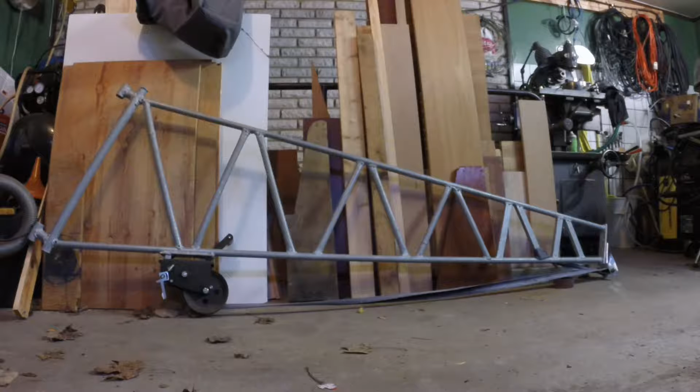This is the old crane. It is made from scrap. It is round tubing, rather thin walled, and you know, my idea was to save weight, but low weight and stability doesn't often go hand in hand. So this crane was not as rigid as I had hoped. Well, not in that way you see it from that angle, but it is bent the other way. I can show you that later. That was the first mistake.

The second mistake was to use a winch with bands instead of wire. The band is totally destroyed, bent, there's a hole in it, and it doesn't stand being outside in the sun and rain all the year round. And then another thing is the pulley here in the end of the crane. It is fixed, so sometimes the load isn't hanging straight down, it comes from the side, and I always get tangled in here.

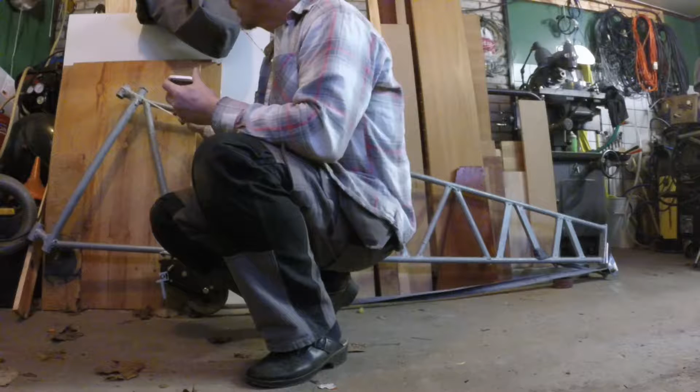The part we are going to make now is this part. We will make a long riser and somehow connect it to these two axles that are on the boat. We'll make the riser here a bit longer, and on the end there will be a pulley that holds the arm. And down here of course there will be a bracket that holds the axle, so the crane arm can pivot. So that's the next part of the project.

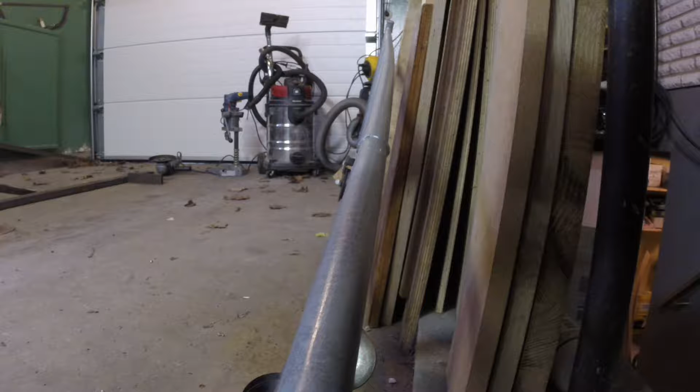I thought I would show you how the crane is bent. I know I'm filming with a GoPro, but this is a real bend, and it is not a critical bend, but as soon as you have high loads on the crane, it will bend more and eventually collapse, of course. So the crane needs to be rigid even in this angle.

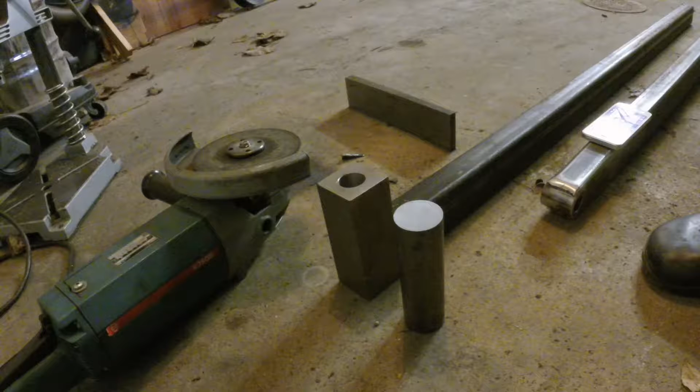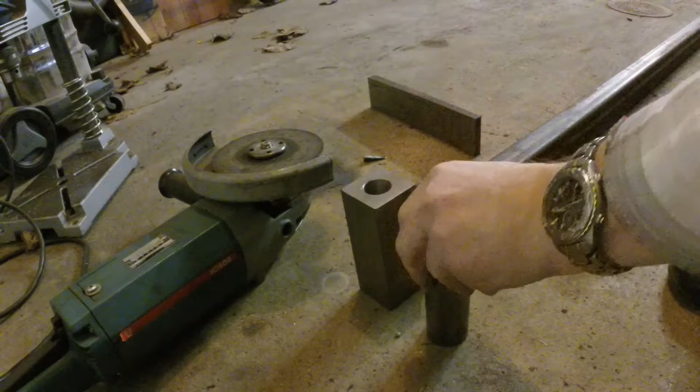I'm having second thoughts. This is going to be on the end of that. Should I use the square or a round? I need to drill a 26mm hole in either one of those. There will be very little material left in this. This is 40mm diameter, and this steel is also 40mm, so it will be nice there. Well, this is the largest piece I have, and it has already got a hole in it. Well, that is too small.

It could of course easily be bored to size in the lathe, and it is 25. Well, it's less than a millimeter that has to go. This, could it look nice? Perhaps I should chamfer the sides here. That might improve the looks. But this piece is the right length, and it looks stable enough. I think I will go with this one.

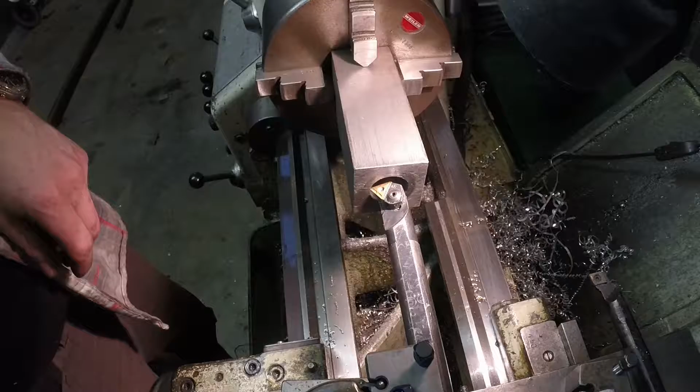And now I will try the more rigid boring bar. Normally I can't use these large tool holders because if they exceed 16mm, normally the cutting edge will be too high. But this is very low, so it might work. Let's give it a try. What can possibly go wrong?

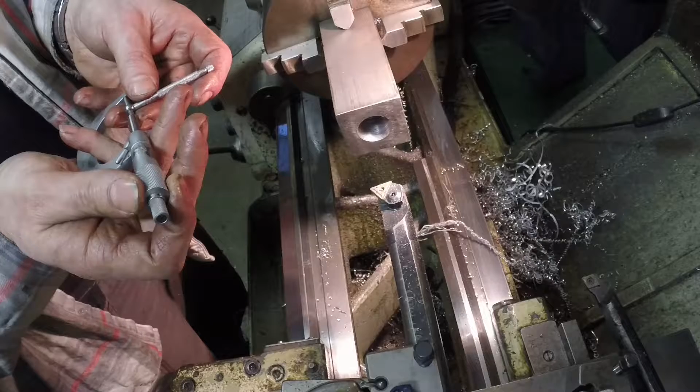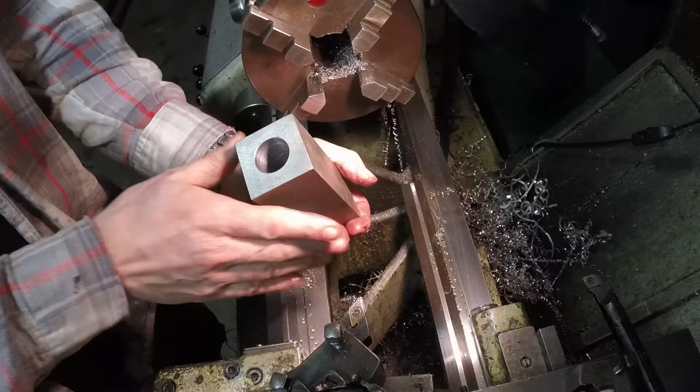I've seen better finishes than that. Will be 26.2 millimeters. Something in those lines. 26.25. Well, the piece is done. Well, that inside is miserable, I know. But it'll have to do. Now I should cut this off in halves.

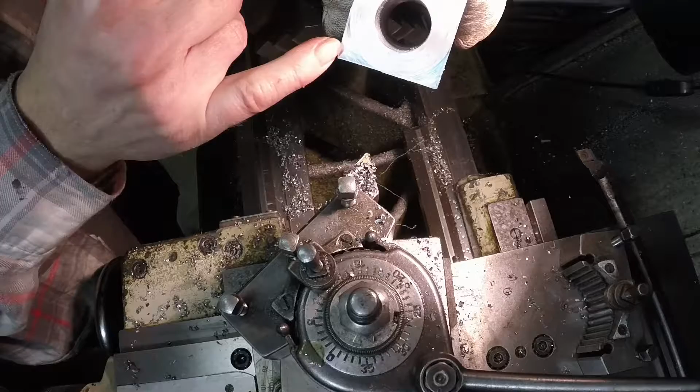Interesting. The finish is perfect when it does the interrupted cut. Well, these are quite sharp edges. Well, a bit of weld prep here, and it's ready to be mounted. But first I will cut the pieces that it should weld to.

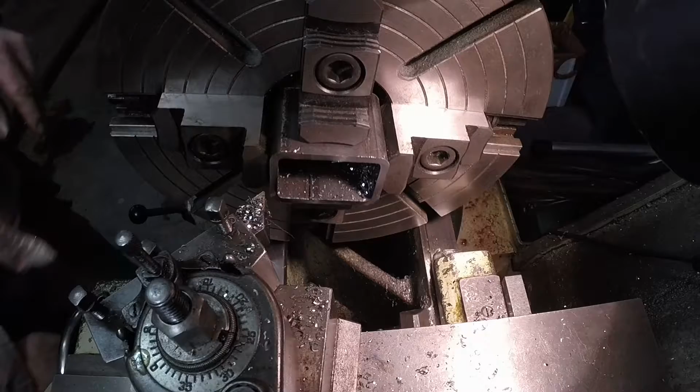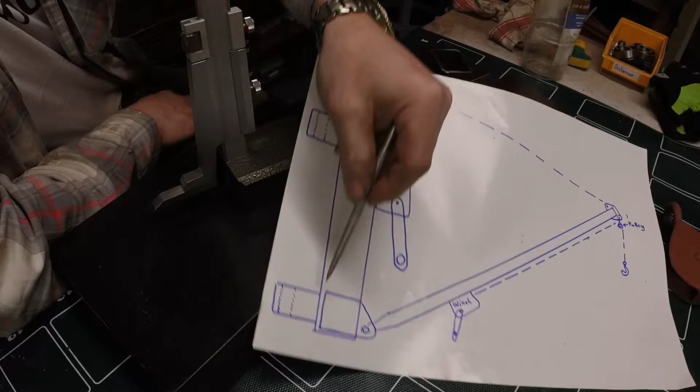Well, the job advances, and presently I've been working with these pieces, and they are now done. Both of them are ready to be welded together, and this piece of tubing is also cut to length and ready to be welded also. And now I'm going to make this bracket down here, and I thought I should show you how I will measure it. Cut these two pieces.

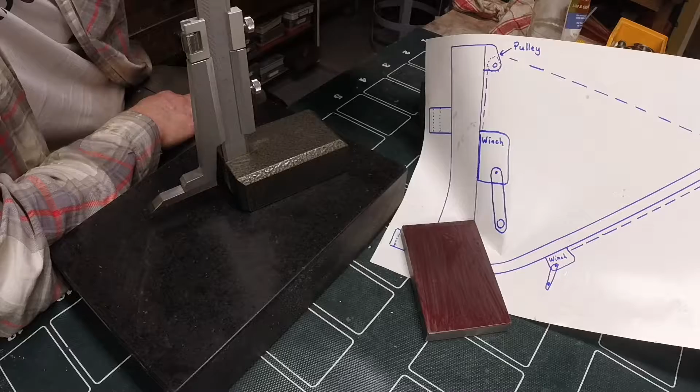I think this hole will be 20 millimeters, and it will look rather nice if it is located 20 or 25 millimeters from the edge. And we will make this slope here straight out, round, and up there.

This piece is 12.5 centimeters long. I think this is 6 centimeters wide here, and I would like this piece not to go all the way, but to give enough room for the weld here. So we'll make this 5.5 centimeters. The rest, 7 centimeters, will stick out. So let's first draw a line at 5.5 centimeters.

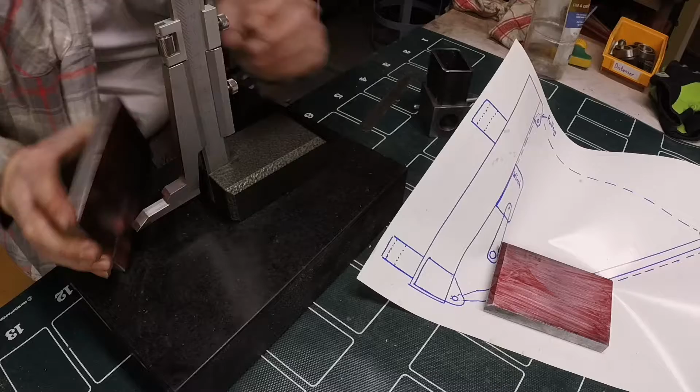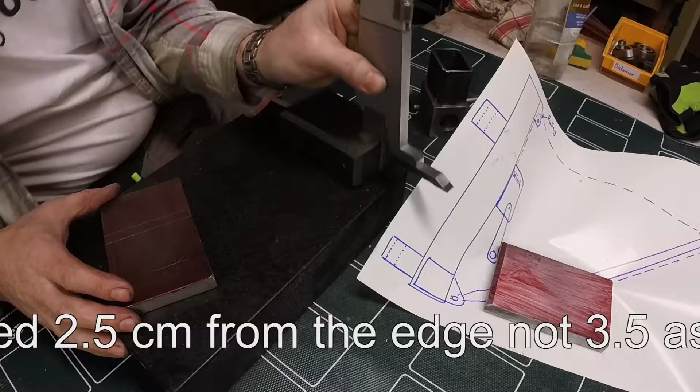So let's make a mark there. Perfect.

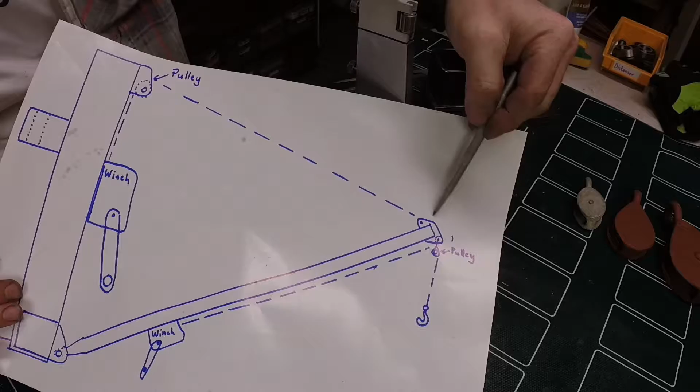So this piece I will mount as I did in the mill with that bracket here. But this time I will not remove as much material, so I can be sure this will be one movement. So I will leave 2 millimeters on the side, and I don't think I will cut this. I think I can mill that out.

However, the hole in the jig, the fixture that I put in the mill, is for a 12 millimeter hole. So we will drill this 12 millimeter first, then mill it, and then drill the rest up to 20 millimeters. So let's do the same on this piece.

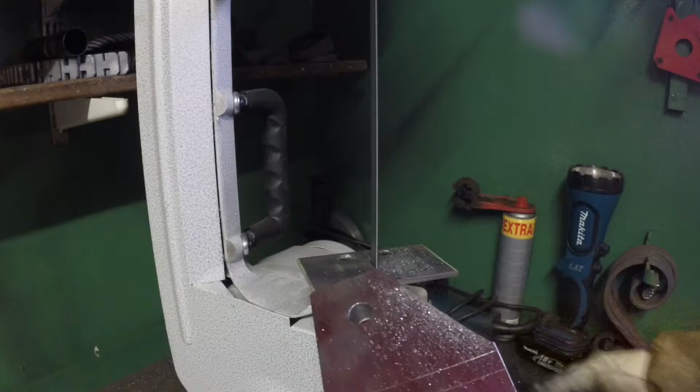Let's go to the mill.

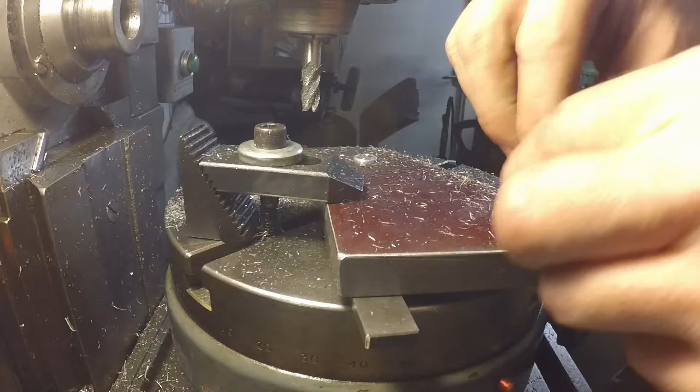Was a lot of work and a nearly perfect result. You know, I know this is only a crane that we're building, but I still enjoy making this. Look, it's perfect. There were a few spots there, but I won't mind those. This is only a crane.

So let's mount the next one.

I think this part is done, and the only trouble I encountered was I couldn't get the mill all the way down here, it's too tight. So there's a little angle there, but besides that, I think this is perfect.

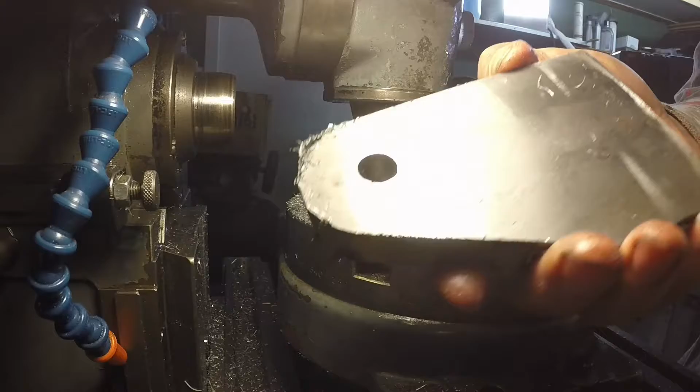Well, now the pieces are ready in the mill. I milled them, and I must say I am so pleased with the result. This is finally working for me, and now I have to drill that hole to size, and then it's time to weld them onto here.

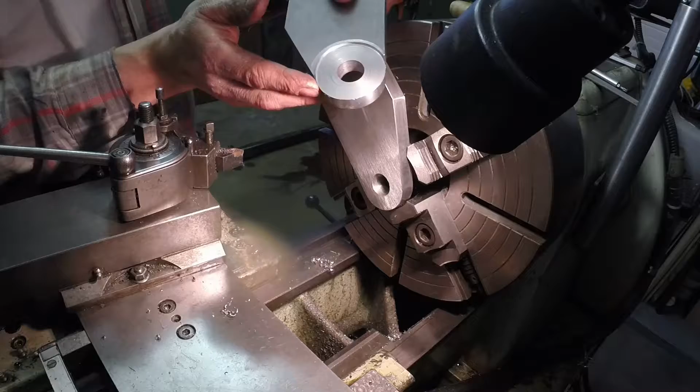Since the boom is slightly wider than the tubing, I have removed a bit here, so it will be a bit more clearance. And this is how I mounted this in my Bison chuck. It is so flexible, you know.

It isn't much that needs to come off only a millimeter.

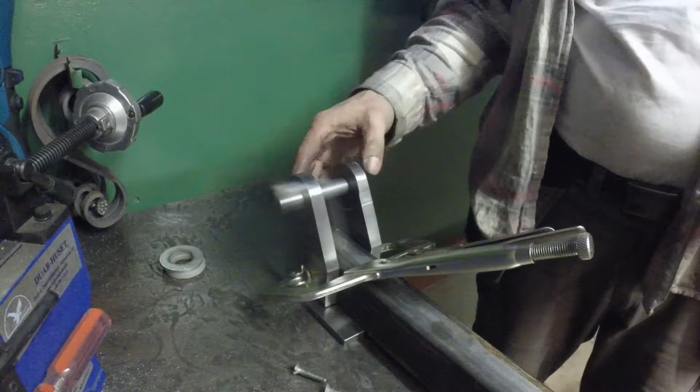So I'm ready to weld now. I put the axle here to align them, to align the holes, and I have squared it up here, so it should be plenty good.

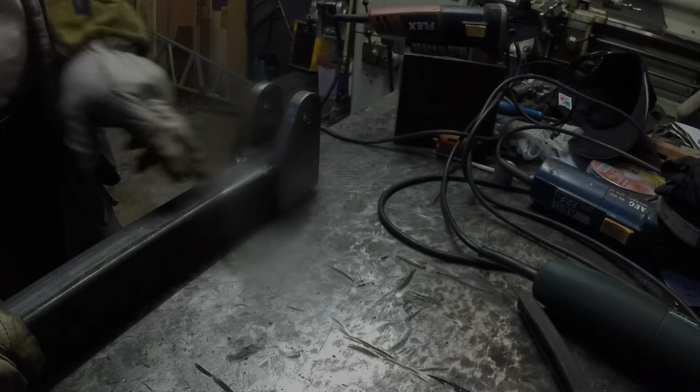Now the lower portion of this riser piece is finished, and we must try it on with the boom. The boom works perfectly. It's stable, it's good. So this is the end of part 3.

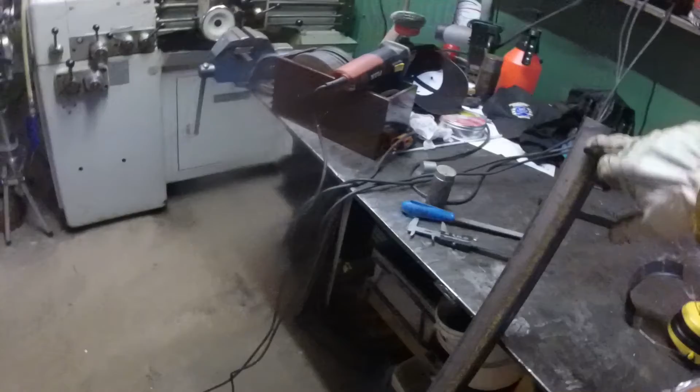In part 4 we will make the bracket that should be up here, and also a lid on top.